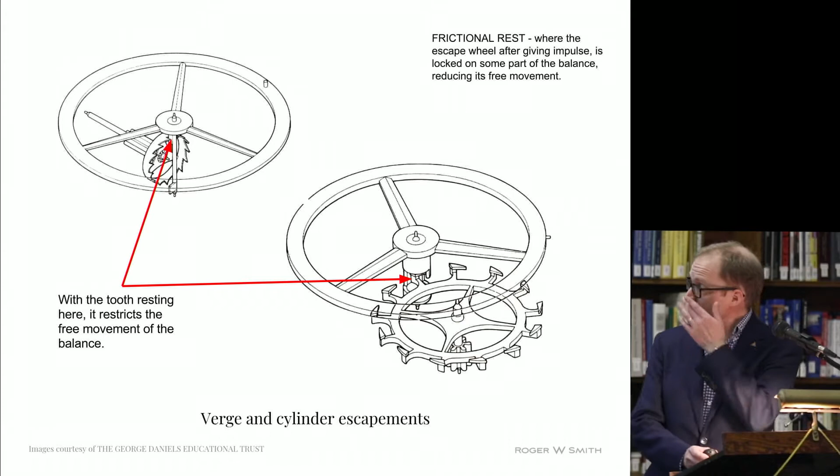So the first area to discuss are frictional rest escapements. What is a frictional rest escapement? On the left we have the verge escapement, and on the right, the cylinder escapement.

Basically, a frictional rest escapement is an escapement where the escape wheel, after giving impulse, is locked on some part of the balance axis, reducing its free movement. So in order to describe that, I will just demonstrate with the cylinder.

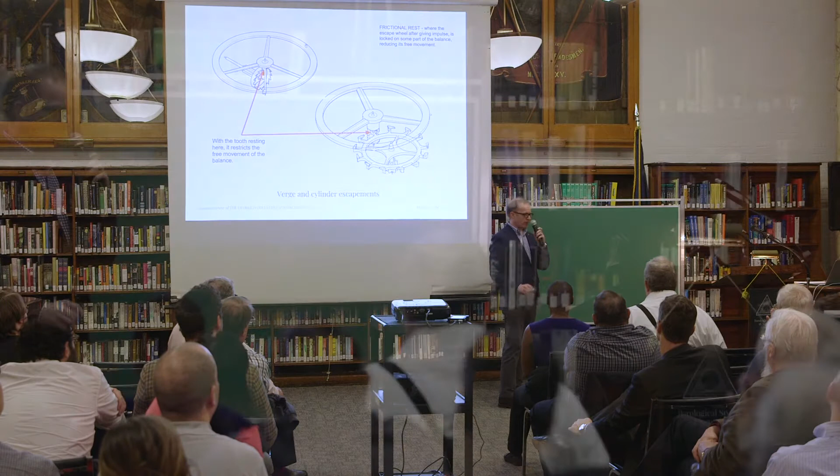Now I'll just warn you, my drawing skills are very basic — I have a 5.5-year-old daughter who is now a better drawer than I am, so bear with me. But basically, a cylinder escapement, we have a circle — this is basically the cylinder of the staff, this is a center line or center point where the balance pivot will be, and this is the center of our escape wheel.

And coming out, we will have a tooth which basically rests upon the wall, the outside wall of the cylinder. So this balance wheel is turning clockwise and anti-clockwise for every vibration, and as the balance wheel turns clockwise, eventually this tooth will drop through the gap here and end up inside the cylinder.

So what we have is a tooth lying inside the cylinder, and it is this issue that frictional rest is really about. Because at all times the escape wheel is trying to turn in a clockwise direction, it's applying pressure onto the cylinder or the staff at these points. And it is this applied pressure, at all times, which restricts the free movement of the balance — this is a real issue with frictional rest.

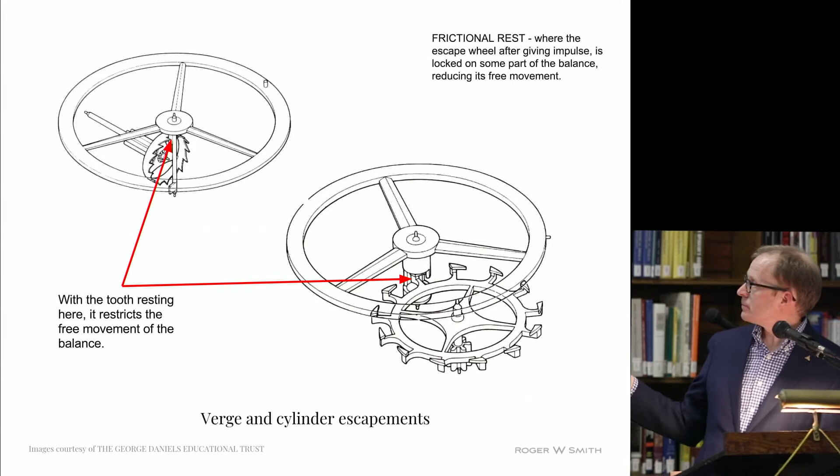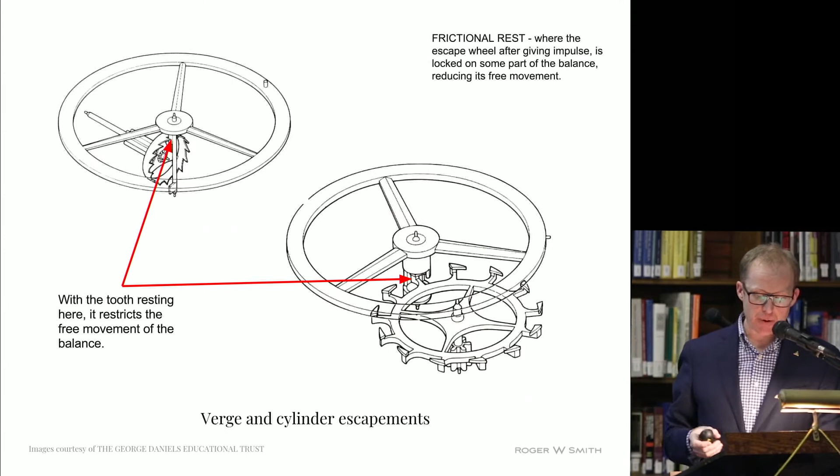In the cylinder escapement, the power is delivered through a sliding action - basically just a slide, and as it slides, it imparts power. Whereas in the verge, the power is delivered through a pushing action. This is a fundamental difference between the two, but I'll be discussing this later on in my presentation.

So detached - what is detached? Well, a definition of a detached escapement is when the escape wheel is locked free of the balance axis by an additional component which is in contact with the balance only during the escaping angle, and sometimes for less than the whole of this angle. It's getting confusing, isn't it? But it goes on to say that the balance is free to vibrate in its natural period during the supplementary arc.

So I'll just do another quick sketch. A good example of a detached escapement is a detent escapement, which is this one here. Highly detached, highly accurate. And if we have the center of the balance wheel here, you can see that over there, impulse jewel.

And then coming down here, we have the detent with its screw there. On the detent, we have a locking jewel here. And then here we have an escape wheel center. We have teeth here.

Now when the escape wheel is locked, we have a tooth resting here on this locking jewel. And what this means is that when this escape wheel, which is trying to turn in this direction, is locked here, when it's delivered its impulse through this jewel, this balance is now free to make its rotation. The reason is because we have clearance here and here, because of this locking here. So this is a good example of a detached escapement.

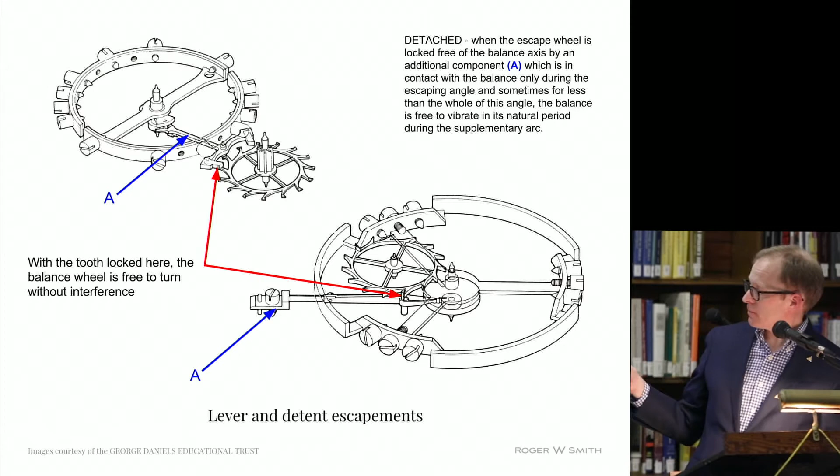A detached escapement is a quality which all precision timekeepers must possess, particularly if you want it to keep time. The finest of the detached escapements is the detent, due to it being highly detached. Its one drawback, however, is that it's only suitable for life as a static timekeeper, and this is because impulse is only delivered in one of the two vibrations.

So in conclusion, a good detached escapement will allow its balance to swing through its arc with minimal interference. The smaller the interference or escaping angle, the more opportunity the balance will have for a consistent arc of swing, and therefore rate of timekeeping.

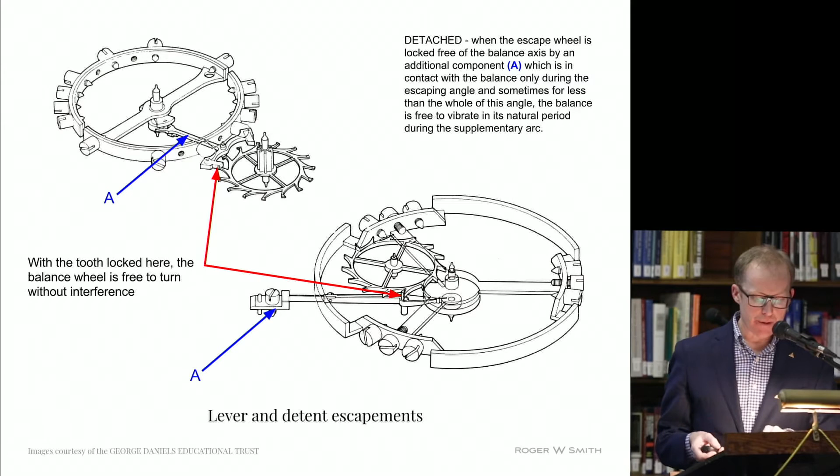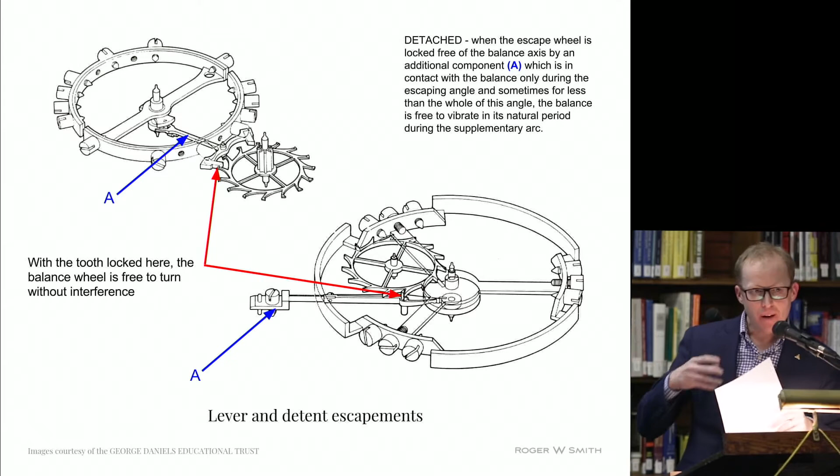So I better just clear up the sort of areas to do with angles and so on. So with a standard sort of arc of swing of a balance - let's say if we choose a balance which is rotating at has a total vibration of 270 degrees.

Basically, during the impulsing of a balance, when energy is delivered through to the balance, we have what's called an escaping angle, and that escaping angle is, in this instance, 40 degrees. We have an unlocking angle, where the escapement is unlocked to deliver the power, and that's 6 degrees. And then we have what's called a supplementary arc, and so we have 112 degrees of swing after each vibration.

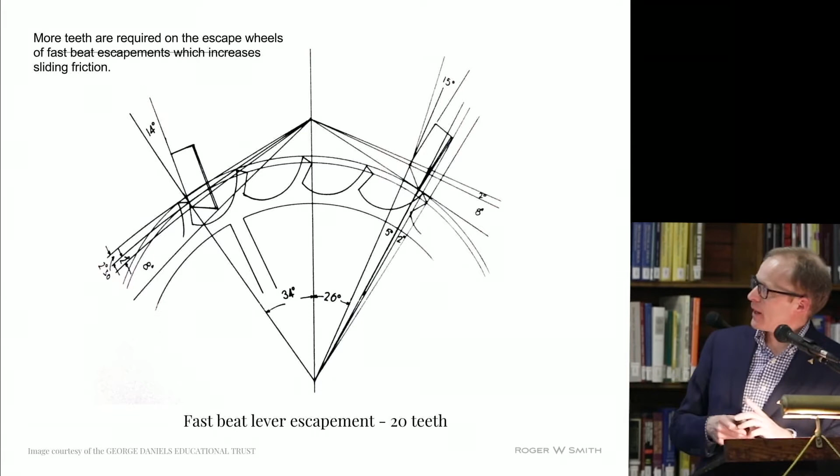So yes, that's a fast beat escape wheel, 20 teeth usually on there, but I'll tell you a little bit more about that later on as well.

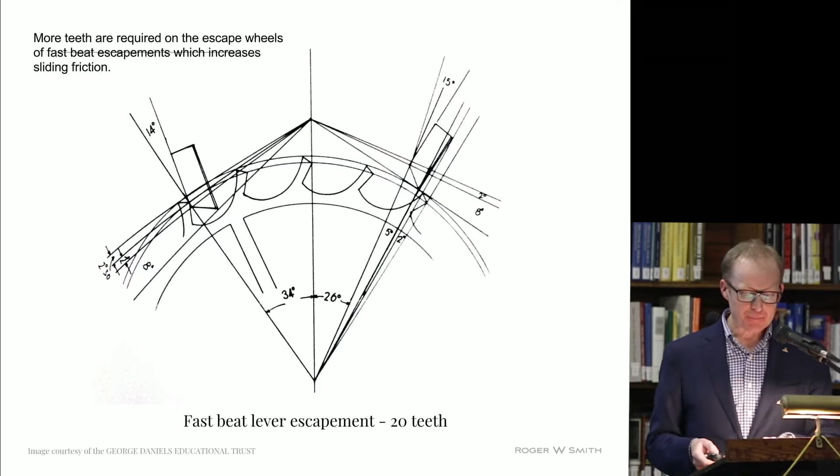So, impulse. Now this was not covered in George's 1990 presentation, and over the years I've become increasingly aware of the importance of delivery of impulse. And when I'm discussing impulse, what I'm really talking about is the clarity or the quality of impulse.

And this I'm going to cover in a couple of sections. The first is delivery of smooth power to the escapement, while a second section is delivery of smooth power through the escapement to the oscillator or balance.

If the impulse is delivered vaguely or sporadically, then you will not achieve a good rate of timekeeping. And so any impulse which is hindered by an applied lubricant or transmission of power will be open to vagaries in its ability to deliver good, clean and consistent impulse. So let's first discuss the poor transmission of power to the escapement.

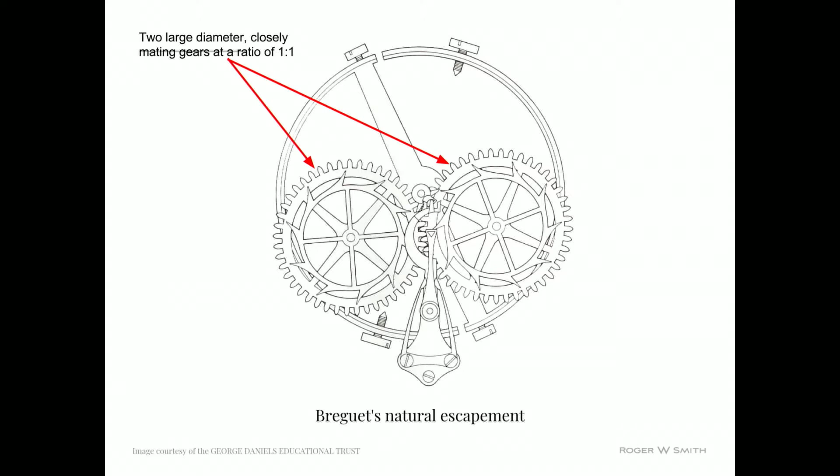So Breguet's natural escapement is a very good example of a poor transmitter of power through to the escapement. Why? Well, it's because of...

These two gears here, which are linked together at a close ratio of obviously 1 to 1, and due to their large diameters, which at their rolling point of contact can act as large disc brakes on the power delivery. Because of that large diameter of these two closely mating gears, you can only ever achieve a theoretical rolling action between both sets of teeth.

Why is this? Well, it is because for the wheels to rotate, they need freedom within their pivot holes. And it is this freedom which will allow the wheels to move past their theoretical rolling point, which will create interference and, in turn, fluctuating power delivery.

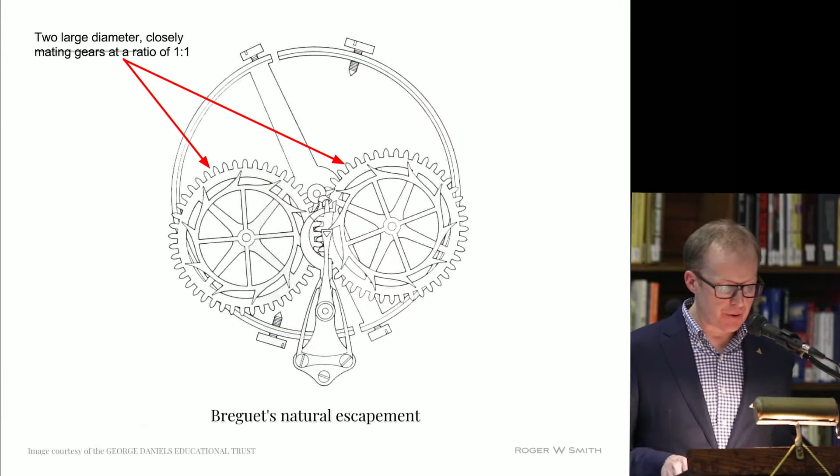Another issue to consider when using large diameter and close ratio gears is tooth surface contamination. Here is an example of where I've seen this occur on the slimline coaxial escapement, where these two sets of teeth mesh together.

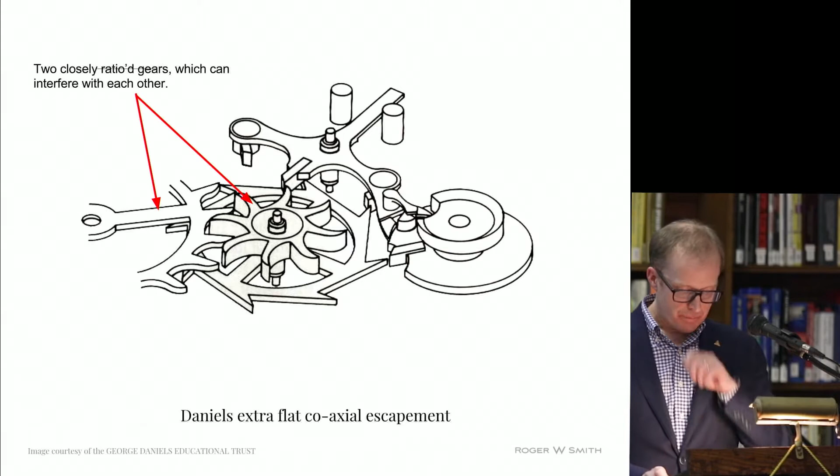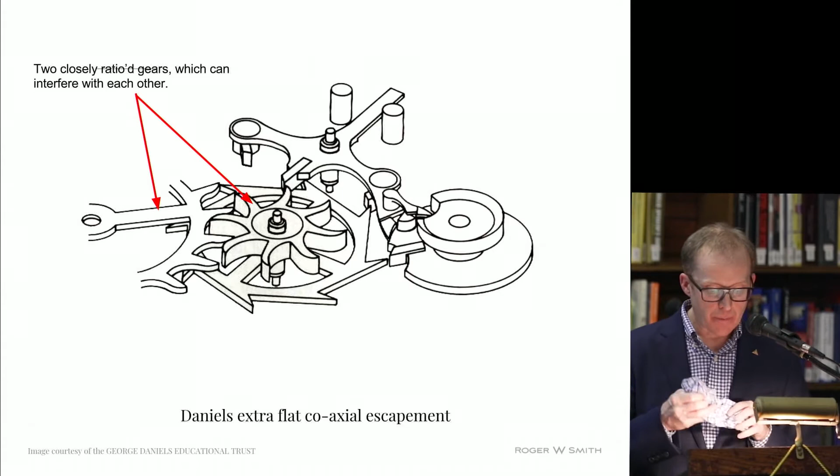I began working on this escapement in 1998, and it became apparent fairly early on that these closely ratioed gears could cause issues, particularly if the surfaces were not scrupulously clean, but also if the surfaces were too clean.

I also experienced tooth surface breakdown, which I put down to the fact that the true rolling action could never be achieved. What I witnessed was a deposit build-up where the two gear ratios vied for settlement and created interference, resulting in a deposit build-up which caused the gears to stagger, or on some occasions to lock.

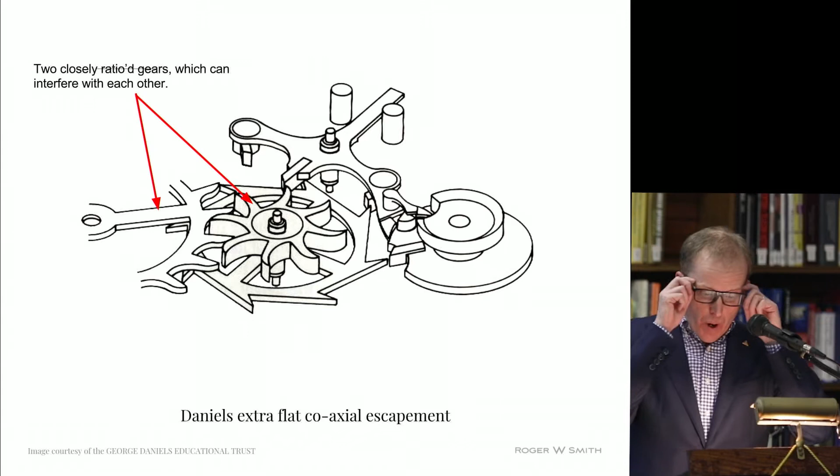So how do we reduce the risk of this interference? In gearing, which requires freedom for smooth running, we can never completely remove this error, but as a watchmaker, it is my duty to minimise it. By using a traditional large gear driving a very small pinion, the effect of this varying depth of engagement between the two mating gears will be greatly reduced, because of the increased dominance of the larger driver over the smaller pinion.

So, two close ratio gears, 1 to 1 - basically two similar diameter wheels, and you have two lever actions which equal each other out. Because these wheels are large diameter and lower down in the train where the power is starved, this issue of smooth transmission becomes more and more apparent.

The way around it is simply to use a traditional setup where you have a large driver turning a very small pinion. It's a simple lever action - we have the dominant gear that masks all the inefficiencies and weaknesses of the smaller gear. That's really the way to create a nice, smooth running train of wheels.

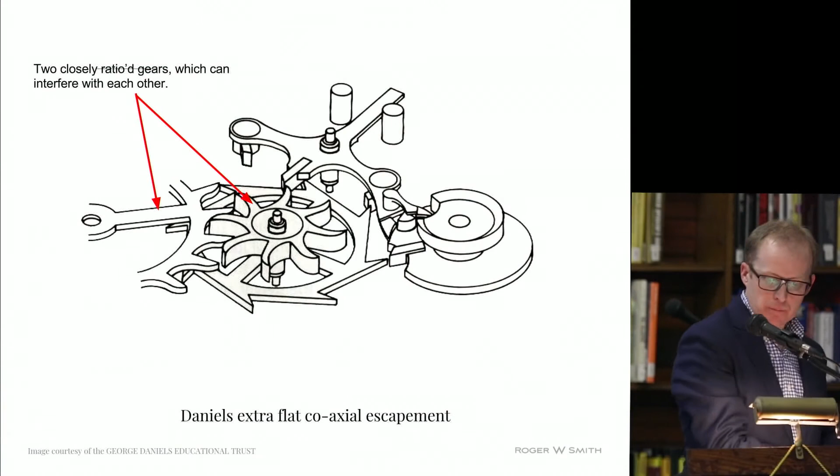So in conclusion, if you are looking for a smooth transfer of power through to the escapement, I would advocate not using close ratio gears in any part of the going train of a watch. Instead, use only traditional ratios, such as 7 to 1 and upwards.

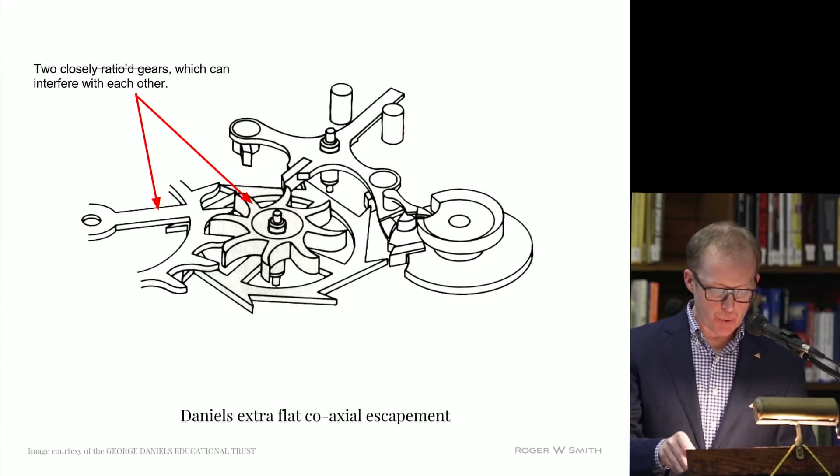How do I start this, Nick? Just click again. Oh, sorry, Nick. Yes, sorry. Sorry. Thank you. Thank you.

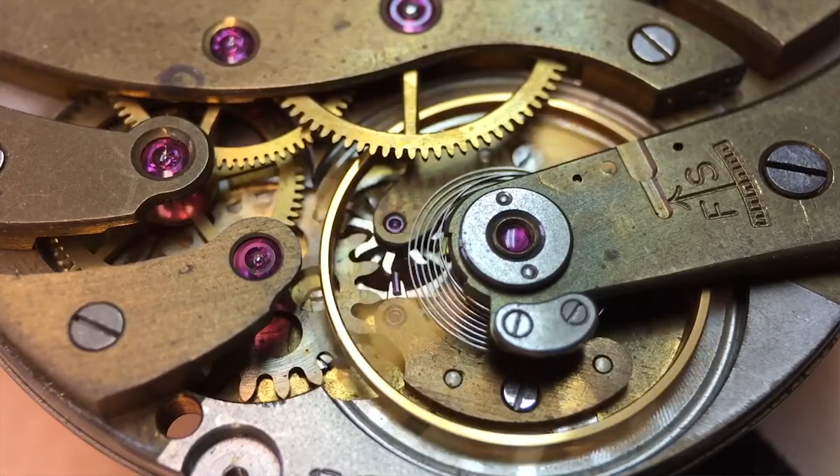So just before I move on, here is a video of the extra flat coaxial escapement in action. This was made and fitted into a caliber 17170 movement by Patek Philippe in 1980, and you can see this very close ratio setup - it's actually a 2.5 to 1 ratio here.

You can see how this is possibly susceptible to stoppage and issues with the surface of the mating gears becoming contaminated, and it's not a good idea. Especially lower down in the train, when you're getting close to the escapement and the balance, when the power delivery is so critical, this sort of close ratio gearing is in my mind a bit of a no-no.

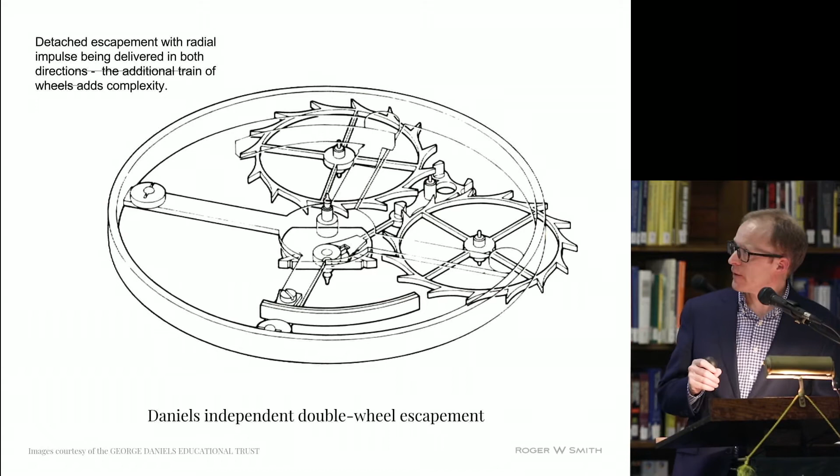So it's this extra escape wheel. Brilliant escapement, and he achieved what he wanted - he achieved radial impulse in both directions, which was key.

Now, I'll just take this opportunity to say that in researching this presentation, I noticed that Wikipedia pages summarise the coaxial as follows - I have to go to Wikipedia to find out about it, you see. And I quote, it says, although a highly ingenious escapement design, the Daniels coaxial nevertheless still needs lubrication to the lever pallet pivots. I must say this is a completely false statement. No oil is required on these pivots at all.

It goes on to say, in addition, because of its geometry, the impulse wheel can only have a limited number of teeth.

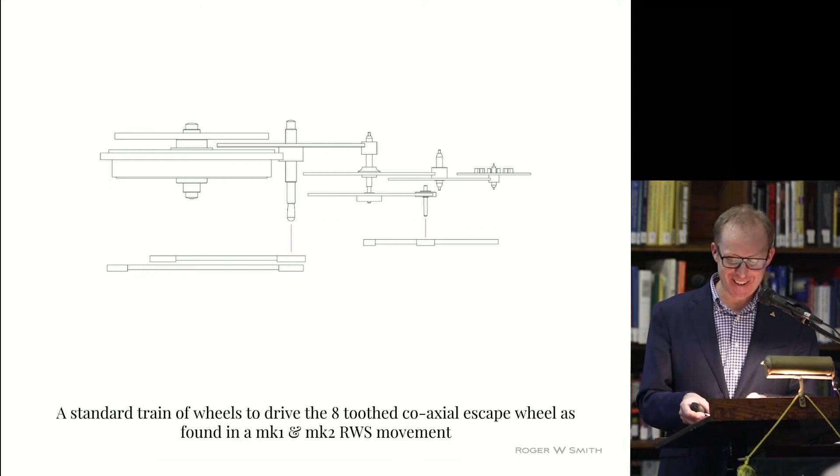It is necessary to have an extra wheel and pinion in the wheel train, the pivots of which will also need lubricating. Now, I would agree with the sentiment of this, but certainly in my experience, we do not need an extra train of wheels, and so we have avoided this completely. I was determined when I set about designing the Series 2 that I was not going to have that extra set of wheels, and Andy Jones, one of my colleagues, who's a far better mathematician than I ever will be, came up with some very clever ratios to get around this issue. What we did achieve is a very smooth running, high ratio gear train, with a straightforward barrel, centre, third, fourth, and escape wheel, driving an 8-tooth escape wheel. So it is possible. If anybody agrees with what I'm saying, and anybody who knows how to get into Wikipedia and correct this error, I'll be delighted if somebody could do it on my behalf.

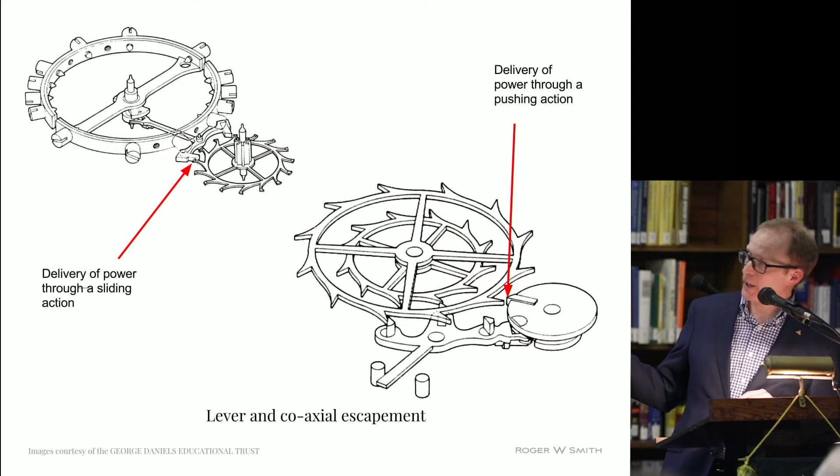Thank you. So I've now concluded my section on smooth impulse being delivered to the escapement. Now we can look at how the escapement delivers smooth and constant impulse through to the oscillator being the balance wheel. So here we have the lever escapement and the Daniels coaxial escapement.

I touched on this earlier when I discussed the verge and the cylinder escapements. You may remember that the cylinder is impulsed via a sliding action, sliding delivery of power, whereas the verge delivers its power through a pushing action. These early forms of transmitting power continue to this day in the form of the lever and the coaxial escapement.

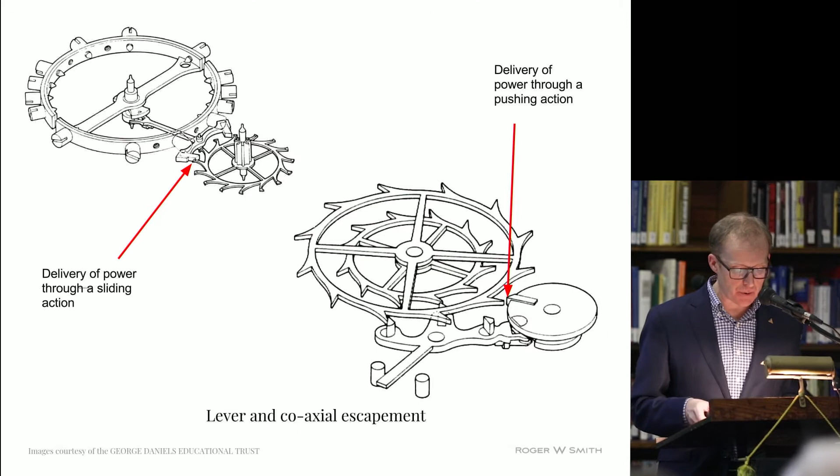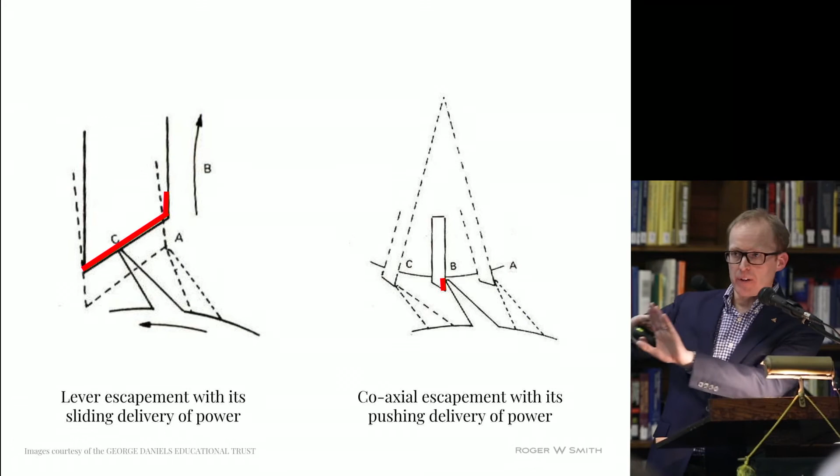Here we have two sketches demonstrating the fundamental difference in power delivery between the lever and the coaxial escapement. On the lever escapement, we basically have this tooth, which initially is locked here on this section in red. Then as the escape wheel is released, as the lever moves, this tooth slides down this long incline face, imparting this sliding action, delivering its power through this sliding action. In the coaxial escapement, we have the tooth hitting the jewel, and as it delivers its power through this straightforward pushing action, there is sliding action, but it's only this much, so it's minimal. And because it's a pushing action, it doesn't really need lubrication.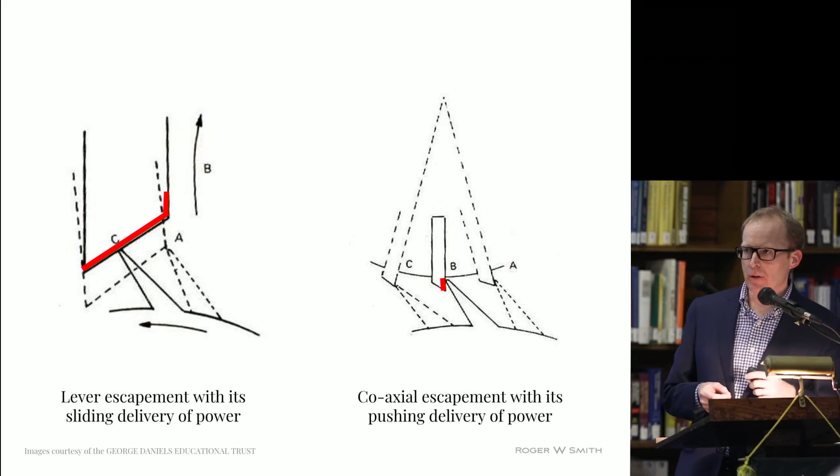So one way I always use to describe the difference between how power is delivered between a coaxial and a lever, I will show you now.

Believe it or not, those are door frames. So we have a hinge here, we have a door, and we have a door handle here. So when you all go home tonight, please practice this. Stand in front of the door with your hand like this, just above the handle, and then basically just walk forward. Your hand will just slide down this portion of the door, and then you're through it - you've delivered your energy and got through the door to the other side. Then what you should do is stand by the hinge and put your hand here, and again walk forward, keep walking forward until that door is fully open and you're out the other side. Basically what your hand will do is travel all the way down the length of this door as you impart this energy. It is this sliding action here which is the drawback to the lever escapement.

Now, for any impulse delivered through a sliding action, it will require lubrication in order for it to function. For an impulse delivered in a pushing action, this is not the case. Although I do use lubrication in my coaxial escapements, the lubrication is not there in order for the escapement to function. This is nothing new. If we look at the verge escapement and the cylinder escapement that we looked at earlier, the verge with its pushing impulse will always work without lubrication, and in servicing, you would never add oil to a verge watch. Whereas a cylinder and its sliding impulse delivery requires oil for it to function - it will not function without oil. And that's the same for the lever.

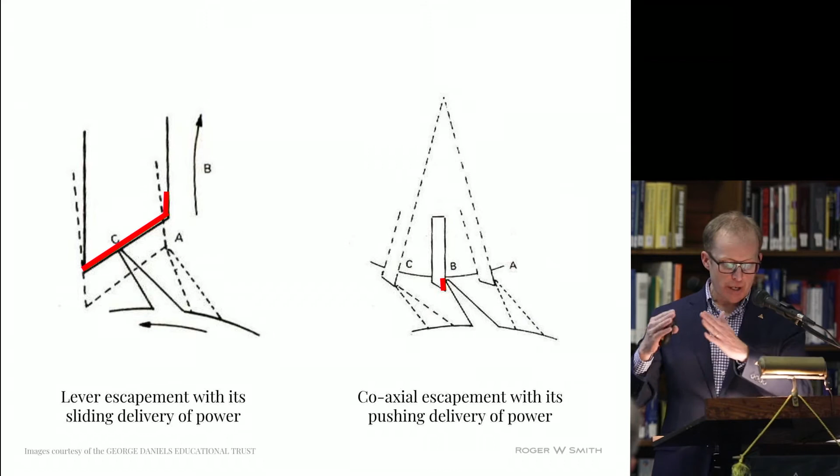As Breguet once said, 'Give me a perfect oil and I will give you the perfect watch.' He was partially correct, but I feel what he should really have said is: there are no perfect oils for a watch, and therefore the watch must be redesigned. George Daniels realised this and designed a new, radical escapement by introducing pushing impulse in both vibrations, where performance would not be affected by the application of a lubricant, which in turn extended the life of the mechanical timekeeper.

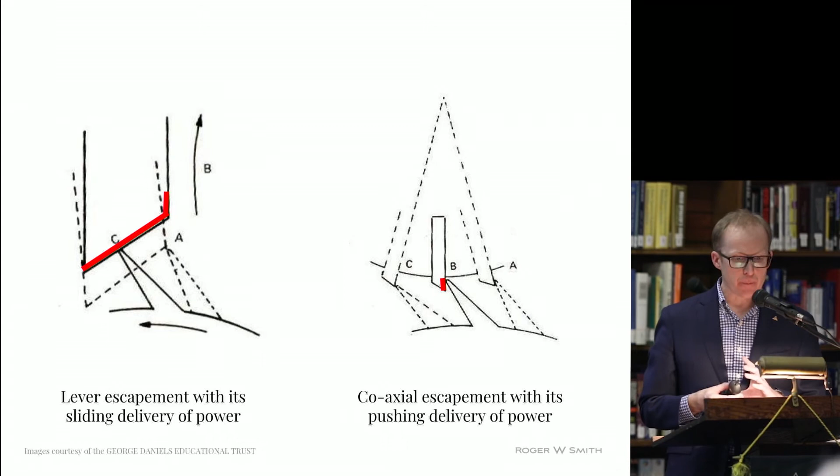So for a 4.5mm diameter escape wheel, the lever escapement spends 210 degrees of its rotation involved in delivery of its power. For a 4.5mm diameter escape wheel of the coaxial, it spends an extra 45 degrees imparting its energy, meaning 255 degrees of its rotation is involved in delivering power through to the balance. And this is good - this is really good. This is a gain.

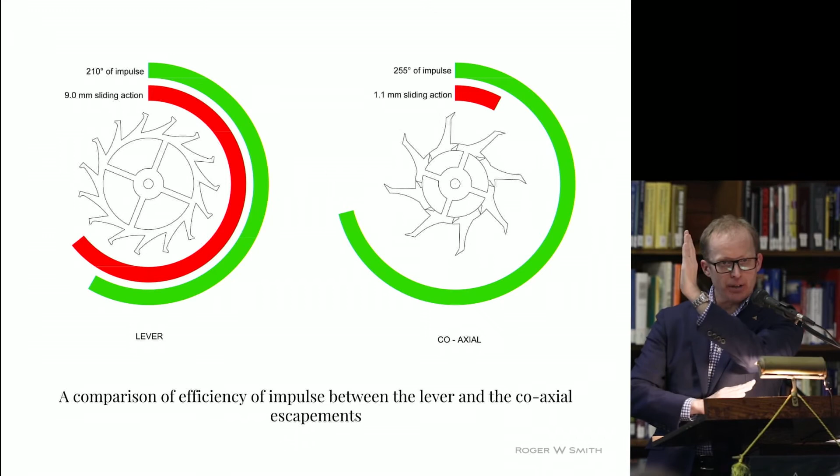What I found really fascinating when I was working on this is that one revolution of a lever escape wheel delivers 9mm of sliding action. If you remember the lever jewel we saw before, a tooth hits the jewel, slides down it, and then down its inclined face. So it's basically multiplying this distance travelled by the 15 teeth on the escape wheel, compared to a coaxial of a lever escapement.

Now, if we look at the coaxial escapement, what is quite incredible is that even though there is a gained increase of power delivery, the amount of sliding action is only 1.1mm for one revolution of the escape wheel, and the rest of the impulse is delivered frictionless - it's just a simple frictionless pushing action.

So for a lever, if we take that 9mm and divide it by the 210 degrees, we get 0.04. If we take the coaxial, take the 1.1mm and divide that by the 255, we get 0.004. If we take the 0.04 and divide that by the 0.004, we get 10. And that 10, for me as a watchmaker, is very exciting, because that indicates the efficiency of the coaxial over the lever escapement - it's 10 times more efficient.

This is brilliant, this is impressive stuff. So for a watchmaker, this is wonderful news, because these energy savings are something the watchmaker can use to further enhance the life of the mechanical timekeeper.

So what are the benefits of this energy saving? It means the vibrations per hour can be dropped down to 21,600, or my preference of 18,000 vibrations per hour, because this escapement is no longer reliant upon the use of a lubricant, and therefore does not have to hide the inefficiencies of the escapement and failure of the oil behind a high beat mechanism. We can go further and reduce the mainspring strength required to drive the watch.

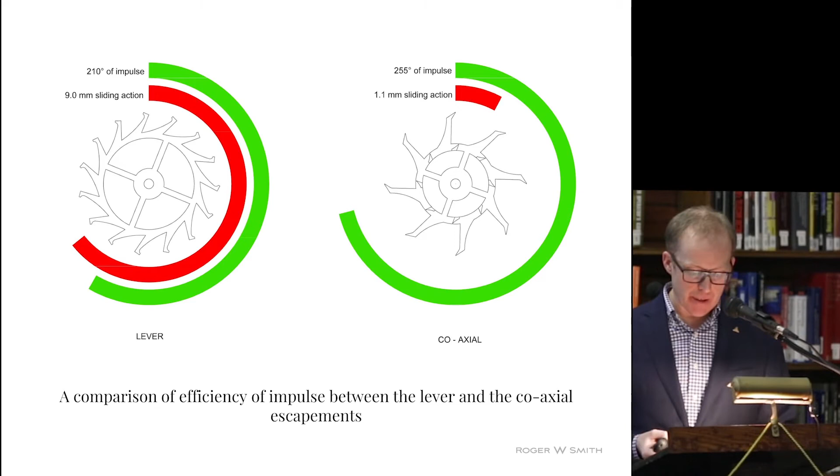This reduced power will reduce the effort it takes in winding the watch, and also the effort the mechanism has to endure in restraining all this power and then releasing it through its train of wheels, etc. The real gain here is that the watchmaker can then extend the service intervals of their watches and reduce the running costs to the owner.

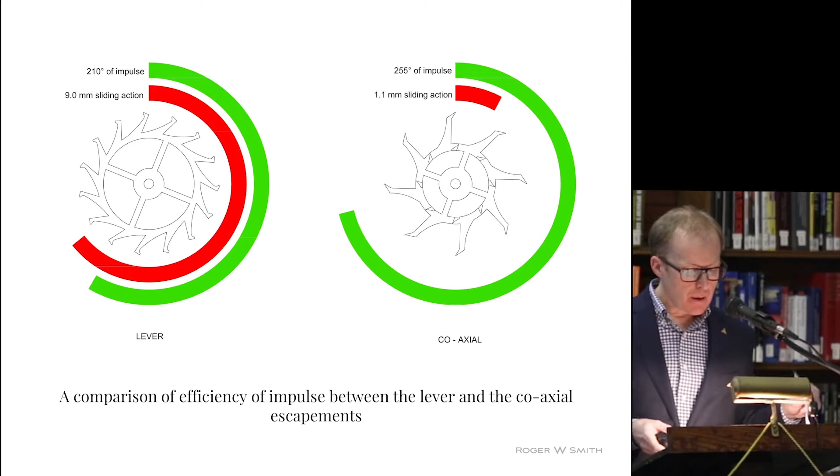And so now, armed with the information and settled in the knowledge that the Coaxial is a world-beating escapement, I began to look at how we can further improve its performance.

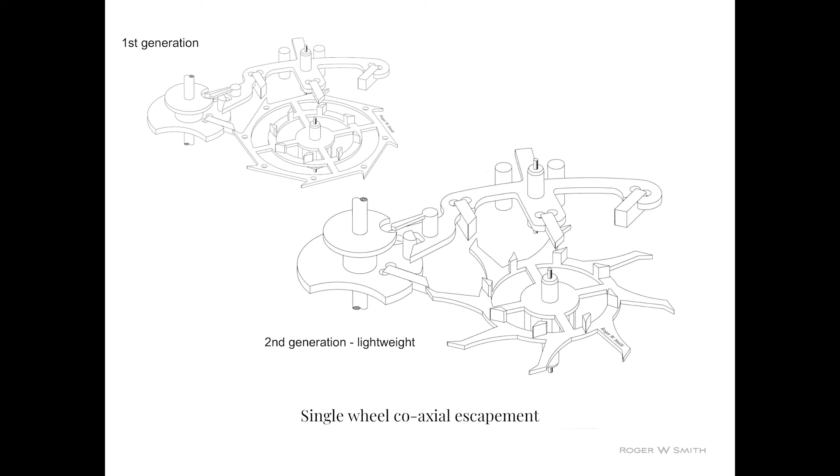So these are two of my single-wheel variants. The upper one there was the very first, which I came up with the idea for in 2010, and over the years it has now migrated into this sort of more lightweight variation.

In 2004 I began development work for my Series 2 wristwatch, and this was a big step for me because I wanted to use a coaxial. Although I had learnt a great deal whilst working with George on his Millennium series of watches, which housed the coaxial escapement, I was still unaware as to how to design and fit the escapement into a movement. As you can imagine, the design phase was a very steep learning curve, but the result was the very first production watch in the world to have been designed to house this new escapement technology.

Initially I used to make the coaxial wheels in the same process that George did - basically a small pinion, then we would mount onto this arbor the lower locking and impulse wheel, and then above that we would mount the second wheel. This worked well for a period of time, but it was very, very difficult.

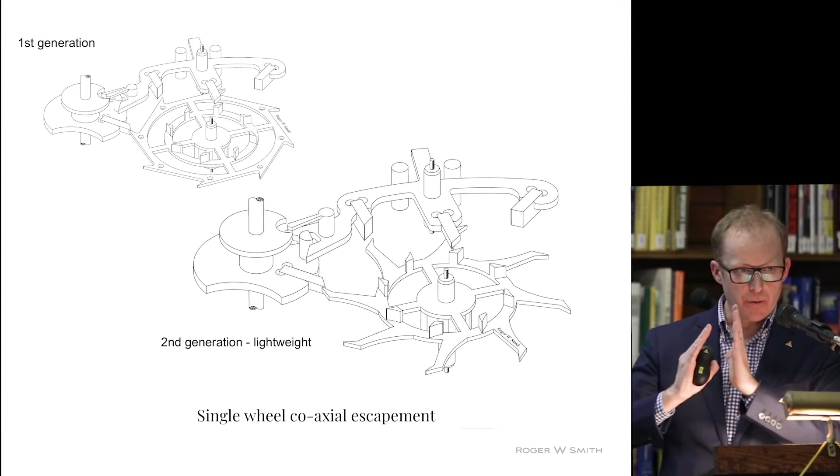I then went further and lightened the escape wheel by removing some of the extra weight to create the lightweight single wheel. This time the improvements were dramatic, and it enabled me to reduce the strength of the mainspring, with all the benefits associated with that.

Interested by this link between weight and performance, I decided to look at reducing the scale of the escapement in the hope of finding more gains. Enthused with the new work-holding techniques developed for the lightweight wheel, I realised that this could happen. A remanufacture of an existing dummy Series 2 movement took place, and the new smaller escapement was fitted. This time the savings in energy were off the scale, and a considerably weaker mainspring was sought to keep the escapement from knocking the banking.

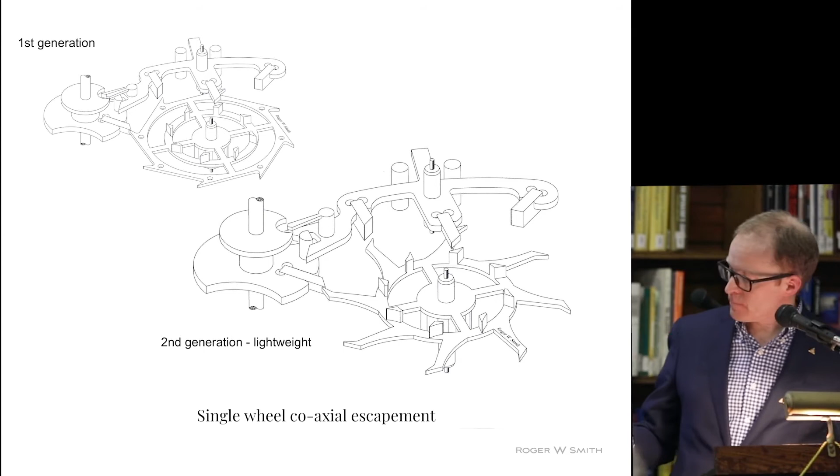And here is a video of that movement. With this piece, the escape wheel has been reduced from a diameter of 6mm down to 4.5mm. I'm afraid the clarity of the escape wheel there is not too good, I apologise for that, but this has been really engaging work, and I now feel that we've entered into a new era of the development of the coaxial escapement.

Due to the super efficiency of this escapement, I am beginning to understand that designing new escapements should not all be about the escapement, but instead we should be considering the long-term effect on the running of the mechanism and savings in energy. This is really where the focus of watchmaking, in my view, should be.

So armed with this experience, which has been steadily gained over the past 20 years, I set about redesigning my Series 2 mechanism to house this new and more efficient single-wheel coaxial escapement. This journey also caused me to rethink my production, and I've now created a small range of 4 pieces based on what I'm now calling my Mark II movement.

The mechanism contains many technical changes which have all been a direct result of the continual refinement of the coaxial escapement and my knowledge. And so this brings my presentation to a conclusion. But before I sign off, I will just summarise the qualities that a watchmaker should be looking to build into his or her watch in order to create a high precision, low energy demanding movement with an extended service interval.

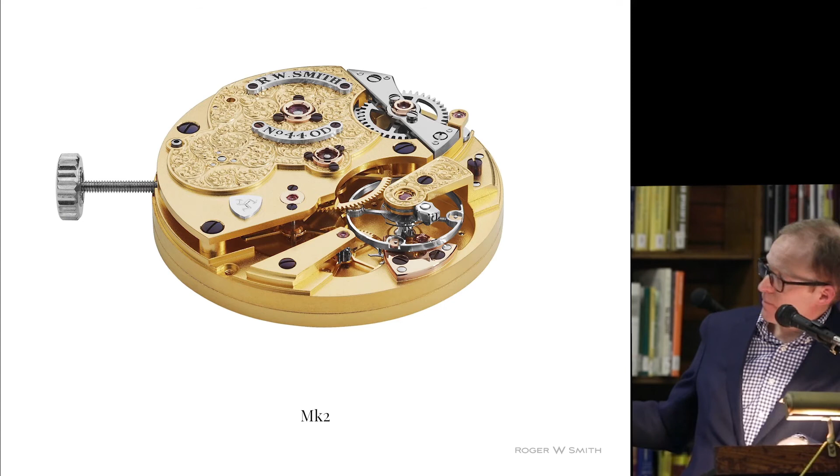A gear train calculated to allow the balance to vibrate at no more than 18,000 vibrations per hour. A high ratio gearing of 7:1 and upwards to smooth out any inefficiencies found within the gears running, which would deliver smooth power direct to the escapement. And of course, a highly detached balance.

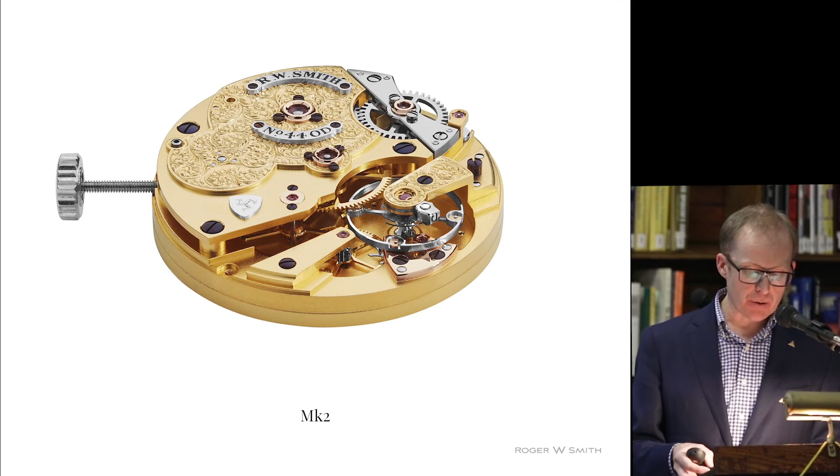We need impulse delivered through to the balance in both the clockwise and anti-clockwise directions. And last but not least, the power must be delivered to the balance through a simple pushing action, so as to minimise the effects on oil through climatic conditions and, of course, its own degeneration.

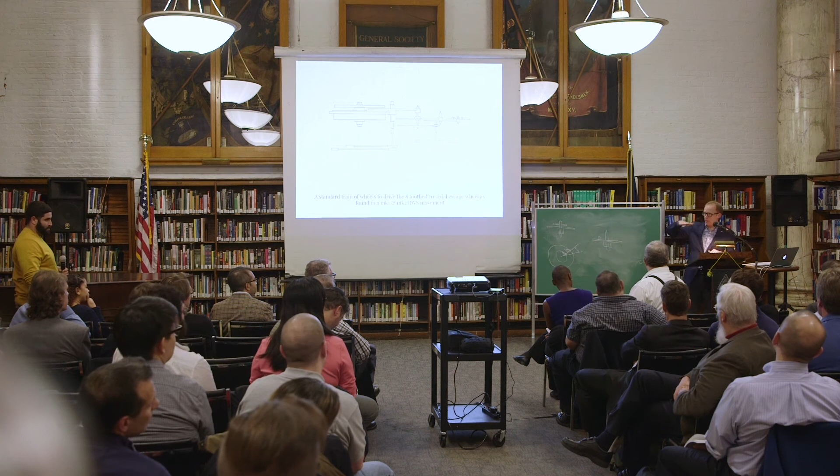Because, with the best will in the world, to get a watch to keep time in the flat, where its pivot is just down - when it's on edge, it'll keep very different time because of the extra friction and so on. So angling it at 30 degrees is a good idea, but it takes up space.

That's the issue. Now, what George did, which was interesting - can everyone hear me? Yes. So he had an end stone.

And his jewel hole there with his pivot coming through of his balance staff. What he did was he ground an off-centre sort of little cup onto the end of his end stone. This had the effect that the end of this pivot always ran on this angle, this curve here. And so that equalised the edge positions from the vertical positions. That was a brilliant way of getting around that issue without physically having to tilt your angle, and it maintained the slimness of the mechanism. That's very interesting - that was what George could do.

Wow, that's incredible. I'm actually reading his book right now, coincidentally on the escapement chapter.

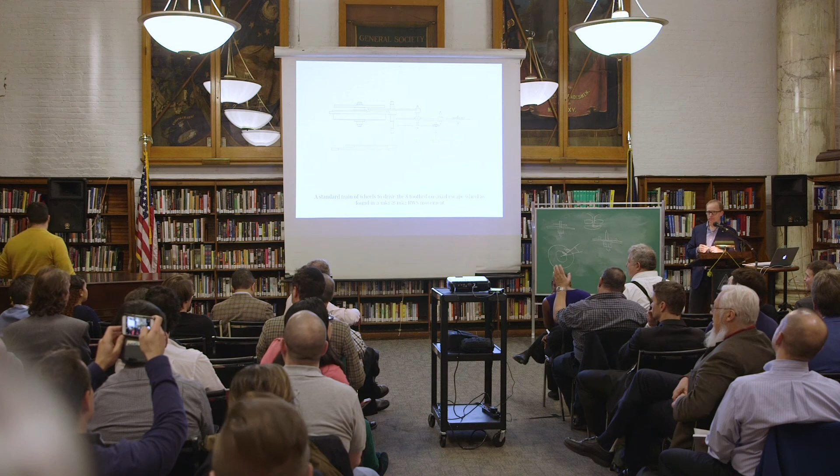Thank you so very much. Pleasure, I appreciate it. Any other questions?

On the balance, now, because you're using less power on the mainspring, you obviously had to reduce the weight on the balance. With that reduction of the balance and the reduction of wear and tear, do you need to lubricate the end cap there on the balance? Oh yeah, definitely, you very still much do so. The balance jewel holes are still lubricated the same. We still lubricate the escapement as well, but it's just that it's not affected by that deterioration of the lubrication.

This series, the Mark II movement, which I've just developed - we're now in production with those watches, and the 4.5mm escapements we're now making, and we're now at the next stage of development. So we've got the smaller escapement, the efficiency of the escapement has improved, the ability for the balance wheel to do its job of timekeeping has now been improved, whereas before we were seeing the escapement at times could influence the balance. Now we've got the balance as king.